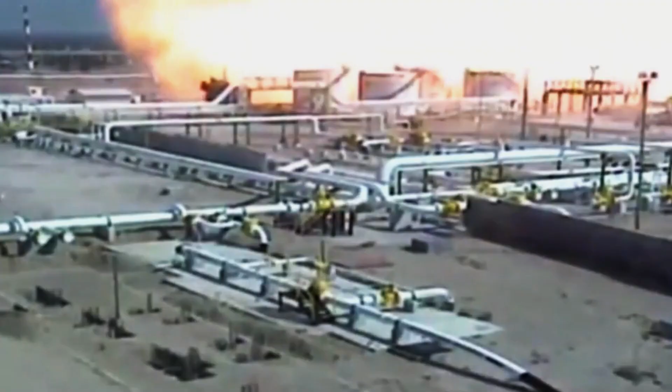A massive explosion rips through a chemical plant in Pasadena, Texas. The blast is so powerful it registers as a 3.5 magnitude earthquake. Windows shatter 8 miles away in downtown Houston. Inside the Phillips 66 complex, steel structures twist, buildings collapse, and a giant fireball rises over the Houston Ship Channel.

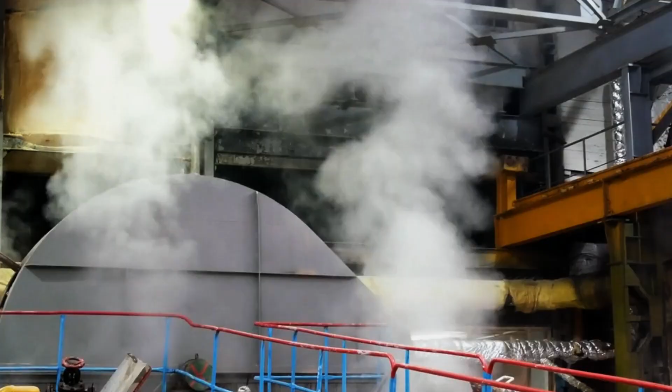In seconds, the refinery turns into a burning disaster zone. When it's over, 23 workers are dead, 314 more are injured, but the explosion didn't come out of nowhere. Just 2 minutes earlier, workers in Reactor Unit 6 heard something unusual, a hiss, not the normal sounds of the plant. A pipe had ruptured, releasing 85,000 pounds of flammable hydrocarbons into the air, ethylene and isobutane forming a massive invisible vapor cloud drifting through the unit.

Workers began to run, because once a cloud like that forms inside a refinery, it only needs one thing: a spark. And on October 23rd, 1989, it found one.

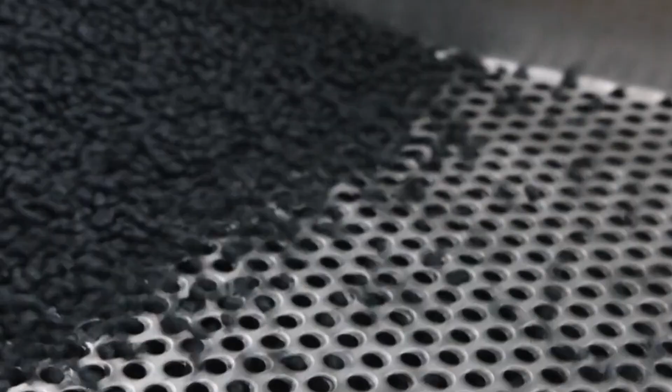The Phillips 66 Houston Chemical Complex wasn't a small operation. Since 1956, this sprawling facility along the Buffalo Bayou had been producing high-density polyethylene, HDPE, the plastic that makes everything from milk jugs to shopping bags to children's toys. The complex had a massive output, 1.5 billion pounds of HDPE per year.

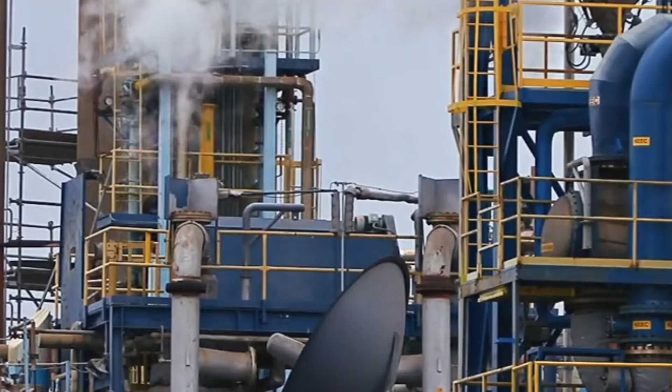That's roughly 15 to 20% of the entire United States supply. On any given shift, over 1,100 people worked on site. Phillips 66 employed about 900 permanent staff. Another 600 or so were contract workers, maintenance crews, construction teams, specialists brought in for specific jobs. The plant operated around the clock, multiple reactor units running simultaneously, each one a pressurized chemical factory producing millions of pounds of plastic. By all outward appearances, it was a modern facility. Safety procedures documented, training programs in place, regular inspections. At least, that's what the paperwork said.

But in the Houston Industrial Corridor, there was already tension brewing. The Oil, Chemical and Atomic Workers Union had been raising concerns for months, complaints about unsafe practices by subcontractors, lapses in maintenance protocols, shortcuts that saved time but added risk. The warnings were filed, meetings were held.

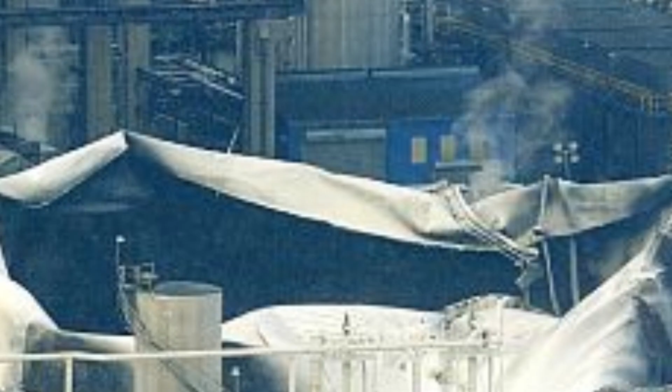Nothing changed. And then, on August 1989, just 2 months before the disaster, something happened that should have been a wake-up call. Subcontractors opened a piping line without properly isolating it first. Flammable solvents vented, the vapor ignited. 4 workers were burned, 2 of them died. OSHA cited Phillips for improper lockout procedures. The fine was minimal. The incident was reviewed, documented, filed away.

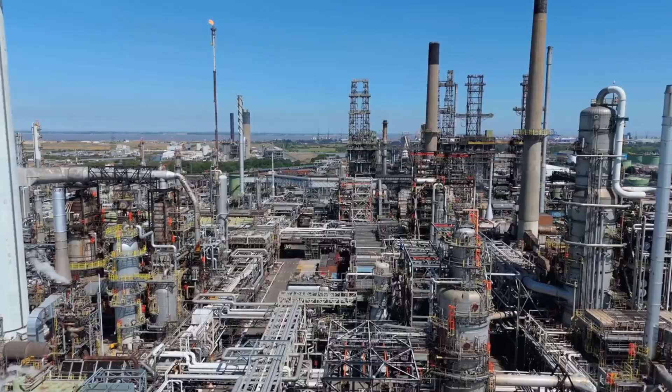Operations continued as normal. On October 22nd, 1989, a Sunday, another maintenance crew arrived at Reactor 6. They had a job to do: clear polymer blockages from the settling legs, just routine work. To understand what went wrong, you need to understand what these reactors actually do.

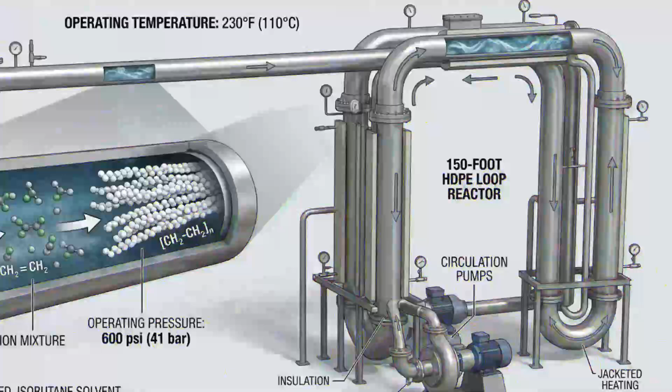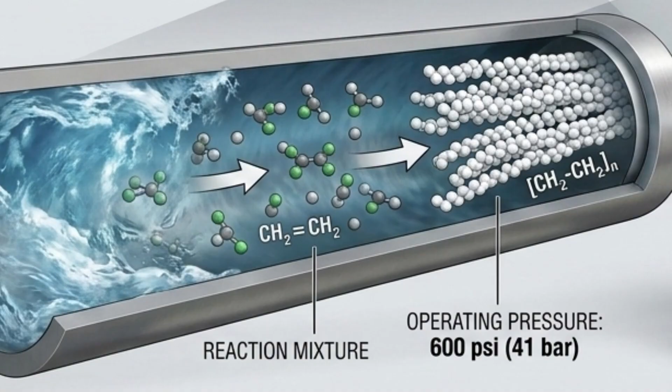High-density polyethylene starts as ethylene gas. Inside a loop reactor, 150 feet of pipe circulating like a pressurized racetrack, the ethylene dissolves into isobutane solvent, along with hydrogen and hexene. The mixture is heated to 230 degrees Fahrenheit and pressurized to 600 pounds per square inch. Under those conditions, the ethylene molecules link together: polymerization. They form long chains that become solid plastic.

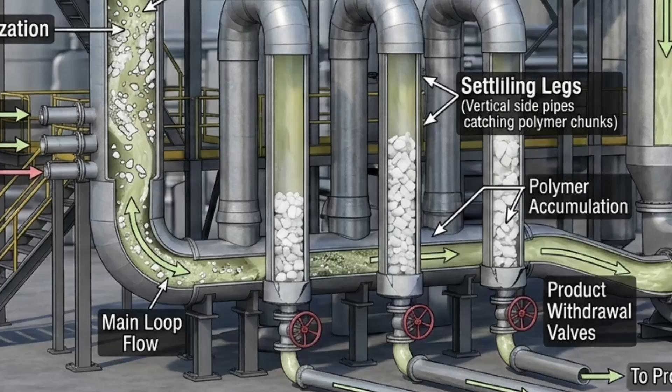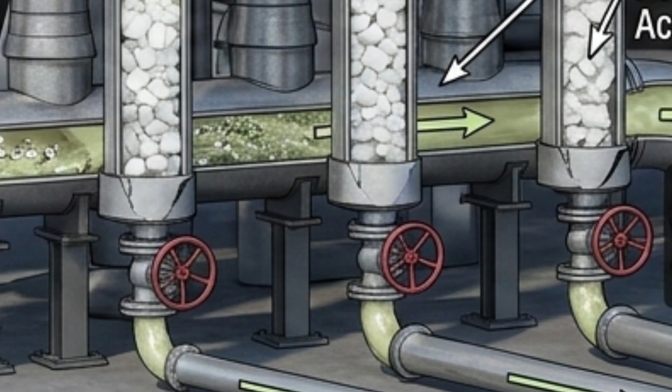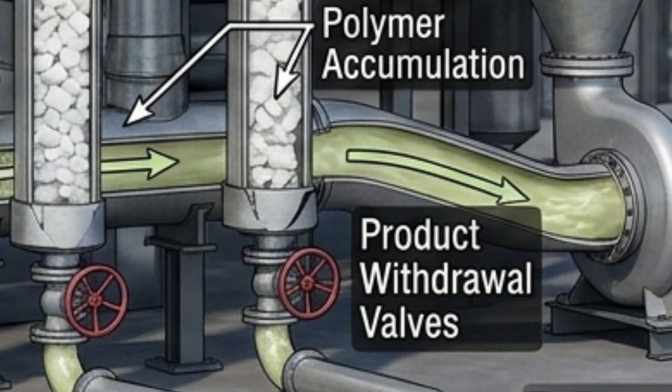But sometimes chunks of plastic solidify and settle. They collect in vertical side pipes called settling legs, designed to catch the polymer before it clogs the main loop. Every few weeks, these legs fill up with hardened plastic plugs. These blockages have to be removed or the reactor can't function. Clearing a settling leg is routine maintenance, but it's dangerous work. You're dealing with a pressurized system full of flammable chemicals at temperatures and pressures that turn mistakes into disasters. One valve opened when it shouldn't be, and all that pressurized hydrocarbon finds the outside air. When that happens, it becomes a weapon.

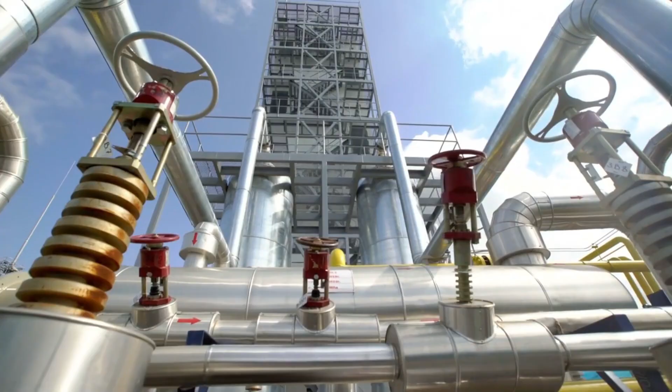The Fish Engineering crew arrived on Sunday, October 22nd. Fish Engineering was a contractor company, hired to handle the maintenance work on Reactor 6's settling legs. The polymer blockage in the second settling leg was stubborn, it needed attention. The crew began their preparation, reviewing procedures, setting up equipment, getting ready for the actual clearing work that would happen Monday. One Phillips operator later recalled something about that contractor crew.

Chuck Soules said they seemed uncertain. His exact words: "The contractors did not know what was going on during the procedure." That uncertainty should have raised flags. But the work continued. By Monday morning, October 23rd, everything was set up.

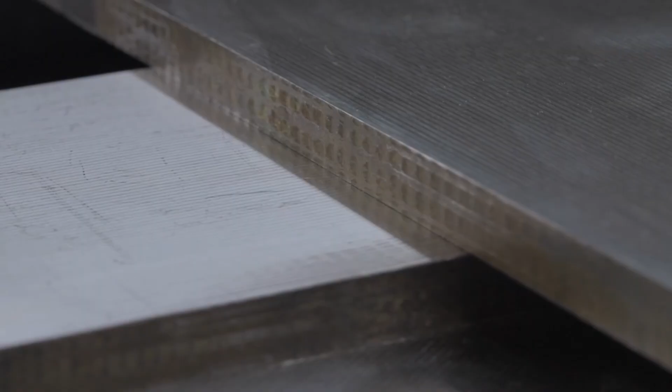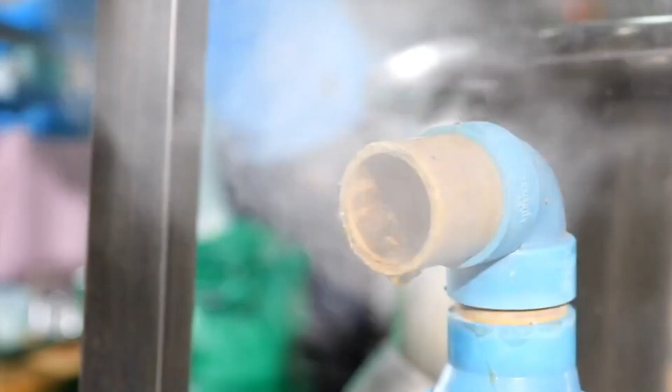The crew was ready to clear the blockage. The procedure required isolating the settling leg from the pressurized reactor. You can't safely work on a piece of equipment that's connected to 600 psi of flammable chemicals. The isolation has to be absolute, physical, verifiable. The standard way to do this: install a blind flange, a solid steel plate bolted directly onto the pipe. No moving parts, no valves that could fail, a physical barrier that makes it impossible for pressurized gas to reach the work area, or depressurize the reactor entirely, drain the system, confirm zero pressure. Create conditions where a mistake can't become a catastrophe.

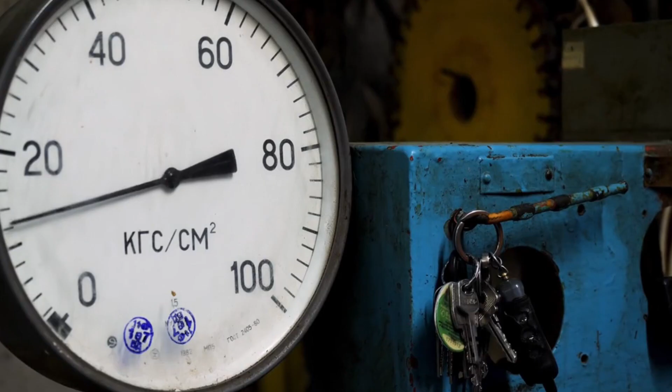But that's not what happened on October 23rd. Instead, the crew used what Phillips called an alternative isolation method. They relied on a closed valve.

They trusted an indicator showing no flow. They assumed the system was safe to work on. They were wrong. The fatal pivot.

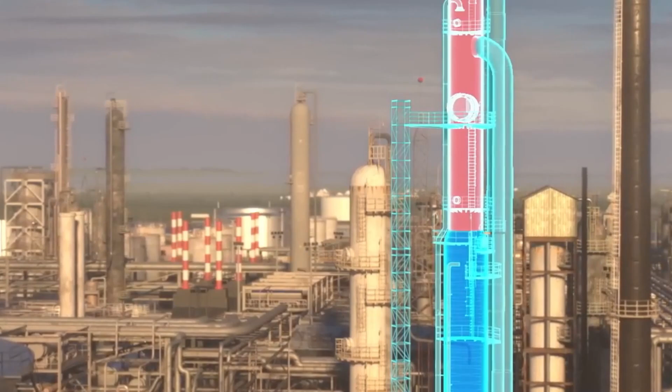Shortly after 1 p.m. on October 23rd, the crew made a decision that would kill 23 people. A safety blocking device was removed from the valve system, and the crew needed to connect pneumatic hoses, the airlines that control whether the large ball valve stays closed or opens.

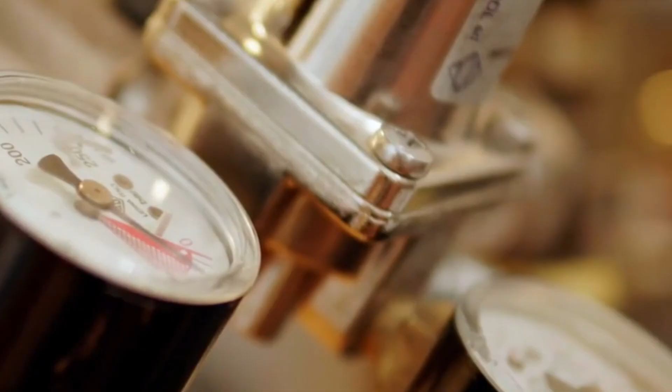There were two hoses, one for air supply, one for discharge. They looked identical, same size, same fittings, same color, interchangeable. The crew connected them, but somewhere in that process, maybe rushed, maybe distracted, maybe just unlucky, the hoses were reversed. Air supply where discharge should be, discharge where supply should be, with the hoses backward.

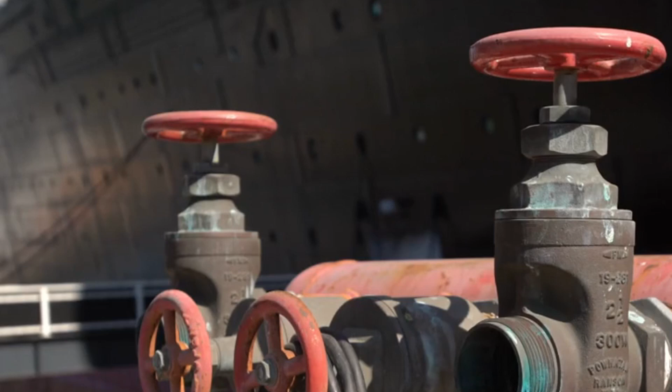And the valve's control system read the opposite of reality. The 10-inch ball valve, a Demco brand valve that was supposed to remain sealed, began to open. No alarm sounded. The indicator still showed closed. Everything looked normal, but inside the pipe, the valve was rotating, opening, creating a path.

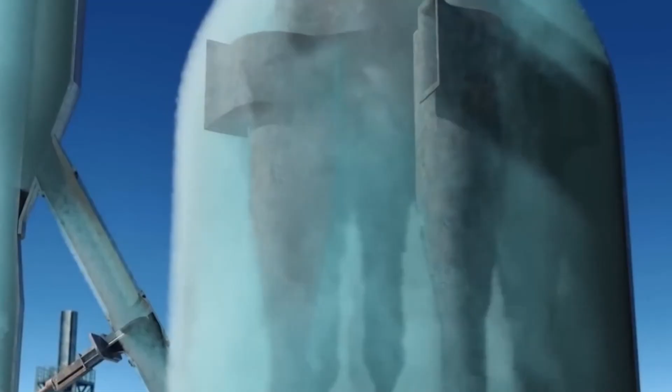The reactor was running, pressurized to 600 pounds per square inch, full of flammable hydrocarbons at 230 degrees Fahrenheit. And now it had a direct opening to the atmosphere. The reactor began emptying itself into the yard.

Release. Two minutes to catastrophe. The hiss started immediately. Not loud at first, just wrong. A sound that didn't belong. Then it became a roar.

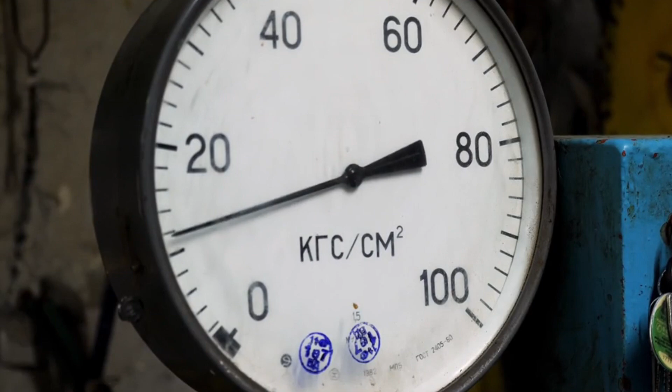Workers near the polyethylene unit heard it first. A deafening rush of escaping gas. Then they saw it. White vapor pouring from the open pipe, billowing up and spreading through the scaffolding and equipment like a living thing. About 85,000 pounds of process gas released in seconds.

Ethylene, isobutane, hydrogen, hexene. A massive cloud of flammable vapor expanding through the plant, flowing along the ground, searching. The alarm siren sounded across the complex. Workers ran. Mike Sinai was 23 years old, a contract worker in the area.

He later described what he saw. "I saw white gas in the air. We heard the alarm. People were falling into ditches." Men sprinted for exits, dove behind equipment, jumped fences. Some didn't know which direction to run.

The cloud was everywhere. The vapor kept spreading. Heavier than air, it flowed like water through the unit, around corners, between buildings. An invisible wave searching for any source of ignition. A hot pipe, an electrical spark, a running motor, anything. Somewhere in that expanding cloud, it found one.

90 seconds, maybe 2 minutes. That's all the time between the first hiss and what happened next. At 1:05 p.m., the vapor ignited.

The explosion was instantaneous and overwhelming. 2.4 tons of TNT equivalent. The blast obliterated everything within 250 feet of Reactor 6. A blinding flash, a thunderous boom that echoed across the Houston ship channel.

Mike Sinai: "Metal was flying in the air and it's just blowing up. It knocked me about 30 feet and you just got up and started running. I jumped the fence and ran over the bayou and just kept on running." The fireball rose hundreds of feet into the air and black smoke followed.

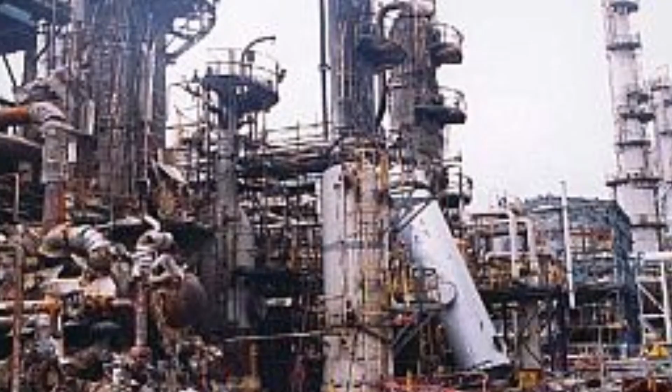Steel structures, multi-story pipe racks, reactor frameworks, bent and twisted like tinker toys. The control room for the polyethylene unit, located too close to the process equipment, was completely destroyed in the first blast. Eight miles away in downtown Houston, windows shattered.

Shirley Morales lived about a mile from the plant. "The blast knocked things off my walls and blew my windows and screens out." She thought a bomb had hit her house, until she ran outside and saw the columns of flame and smoke.

Mike Buchanan was driving on Interstate 10, 5 miles away. "Everything shook with that tremendous boom, and then it began raining pieces of sheet metal." Seismographs registered it as a 3.5 to 4.0 magnitude earthquake.

But the nightmare was just beginning. The secondary explosions. 10 to 15 minutes after the initial blast, as workers fled and first responders rushed toward the plant, a second massive explosion rocked the complex.

Two 20,000-gallon isobutane storage tanks had been sitting near the polyethylene unit. The spreading fire reached them. The tanks ruptured. Another enormous fireball erupted into the sky. Workers and firefighters dove for cover as debris rained down again.

25 to 45 minutes after the first explosion, a third major blast occurred. Then another polyethylene reactor vessel in an adjacent unit failed catastrophically. The heat and pressure from the surrounding inferno breached its containment.

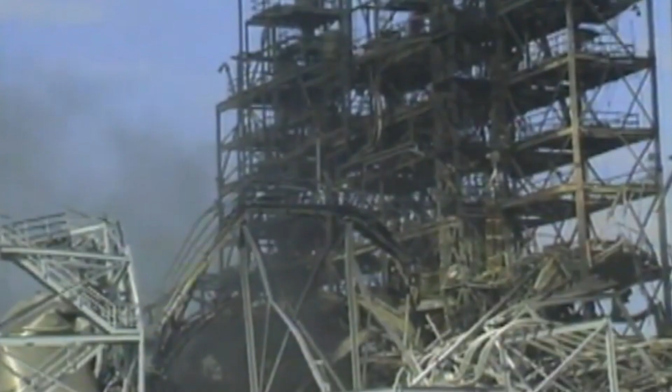The initial explosions had wrecked the site's infrastructure, and critically, they had destroyed the firefighting water system. The complex didn't have a separate firewater supply—it relied on the same water lines used in chemical processes. The explosions severed these lines, fire hydrants were sheared off at ground level, and water pressure, exactly when it was needed most, plummeted to nothing.

Backup diesel pumps that could pressurize the system failed. One had been out of service for maintenance. Another ran out of fuel after running briefly. Electrical fire pumps went offline when their power cables burned through.

Firefighters had to improvise. They laid hose lines to retention ponds, to the cooling tower basin, to the water treatment facility on site, to a neighboring company's water main. Anywhere they could get water, they used specialty foam pump trucks from mutual aid partners, mass deluge equipment, anything that could throw water and foam onto the flames.

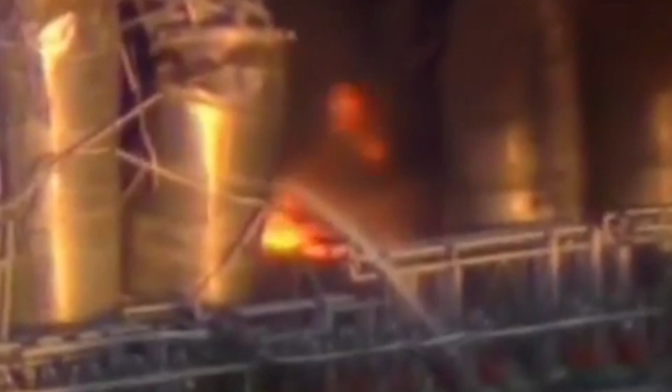It was a 10-hour battle. Crews poured thousands of gallons onto the twisted wreckage of the plant. Slowly, gradually, they gained ground. The main fire was brought under control late that night, but even then, smaller fires and hot spots continued to smolder.

The water rescue: during the height of the fire, over 100 employees found themselves trapped. The administration building sat on the complex's waterfront, along the Houston Ship Channel. Normal exit routes had been cut off by flames. Workers couldn't evacuate on foot without walking through the inferno.

They took shelter in the building and waited. The Coast Guard and Houston Fire Department mobilized boats. Firefighting vessels and rescue craft crossed the ship channel to the plant's dock area. One by one, they ferried more than 100 people to safety on the opposite shore. The water evacuation likely saved many lives—those employees would have had no way out otherwise.

The heat was too intense to enter the worst-hit areas until the next morning, October 24th, even after the flames were extinguished. The wreckage was structurally unstable—twisted metal, collapsed structures, the risk of further collapse. Search and rescue teams waited for the site to cool, then moved in carefully, documenting everything, searching for victims.

The Harris County Medical Examiner's Office coordinated the recovery. They worked methodically—any physical evidence that might explain what happened had to be preserved. The grim count was confirmed: 22 workers dead at the scene. One more would die later from injuries. 23 total. Most of the bodies were found within 250 feet of Reactor 6.

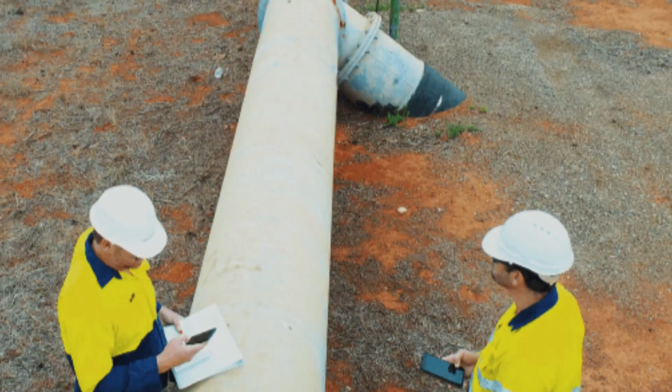How did this happen? OSHA arrived within an hour of the initial explosion. Inspectors and safety specialists moved in quickly to preserve evidence. They documented the scene, photographed debris, collected samples, interviewed survivors. Over the next 6 months, OSHA engineers reconstructed what happened with forensic precision.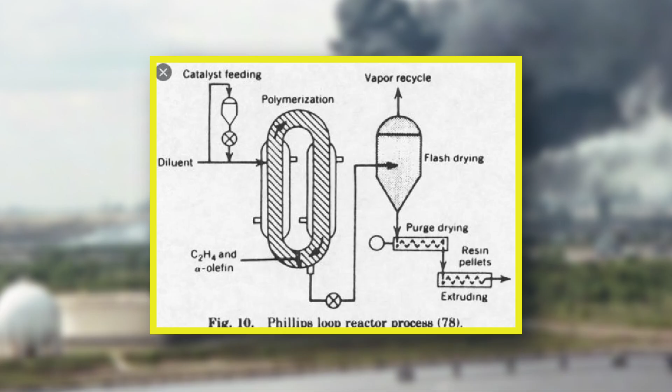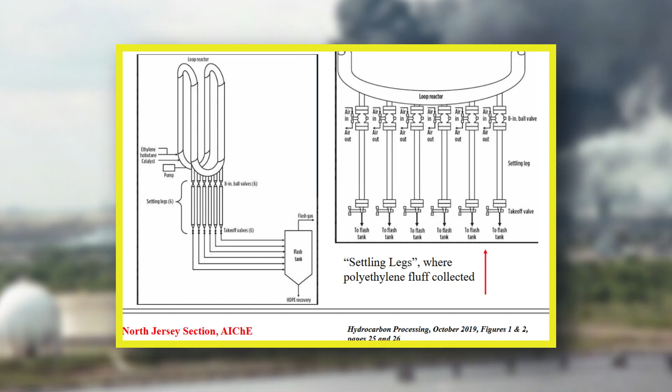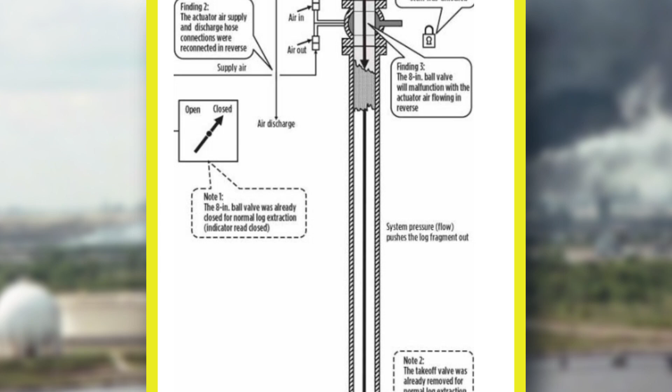They traced the sequence step by step—the maintenance procedure, the isolation method, the valve operation, the hose connections—and they found the answer everyone had been asking. The crew working on the settling leg had no effective isolation between the pressurized reactor and the section they were working on. They used Phillips' alternative isolation method, trusting a closed valve and the absence of flow. But that method failed. The pneumatic hoses controlling the valve had been connected in reverse. When the crew thought they were keeping the valve closed, they were actually commanding it to open. The 8-inch ball valve opened directly to atmosphere.

99% of the reactor's contents explosively decompressed in seconds—600 psi of pressure forcing 85,000 pounds of flammable chemicals into the open air. Then investigators found something even worse: a critical design flaw that made this disaster inevitable.

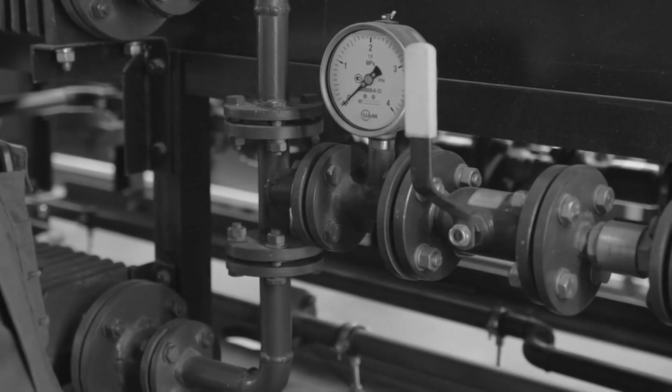The air supply hose and the discharge hose for the valve were identical. Same diameter, same threads, same fittings, same appearance. No labels, no color coding, no physical difference whatsoever. An operator could reverse them, and no one would know until it was too late. Even the valve position indicator could show closed when the valve was actually open. Human error made possible, made likely, by catastrophic design.

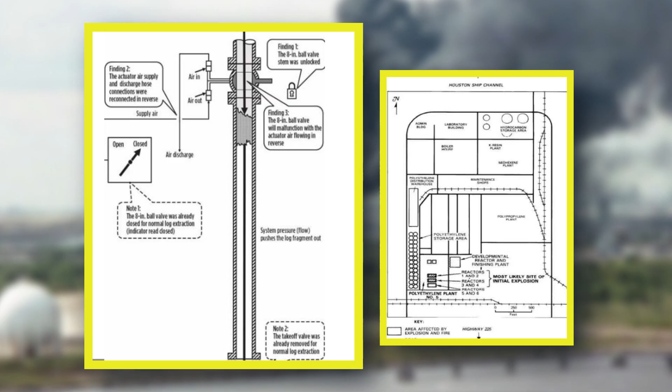But the investigation didn't stop there. The procedure that killed—OSHA's conclusion was damning. The procedure for clearing settling legs was grossly inadequate. It didn't ensure proper lockout. It didn't require physical isolation. It left too much room for human error, and Phillips knew it.

Internal documents, uncovered during the investigation, showed that the company's own engineers had noted issues with this procedure before. They had recommended improvements, and management ignored those recommendations. The plant layout made it worse.

OSHA found inadequate separation between buildings and between occupied work areas and hazardous equipment. Distances violated accepted engineering practices.

The control room was so close to Reactor 6 that it was demolished in the initial blast, meaning no emergency shutdown actions could be taken. The isobutane storage tanks were close enough to the process unit that the fire caused secondary explosions. There were no blast walls, no segregated zones, no protection for escape routes.

The firewater system had no dedicated supply, a known vulnerability. Heavy reliance on contractors for critical maintenance without sufficient oversight created what investigators called diffused responsibility for safety.

The Fish Engineering crew was performing a high-risk task at the heart of the operation, but they weren't as experienced or trained in the plant's hazards as they should have been. Chuck Soul's observation that they did not know what was going on was prophetic.

The receipts: after 6 months of investigation, OSHA presented its findings. 566 willful safety violations and 9 serious violations, all attributed to Phillips 66 in connection with the explosion. Fish Engineering, the contractor, received 181 willful violations and 12 serious violations.

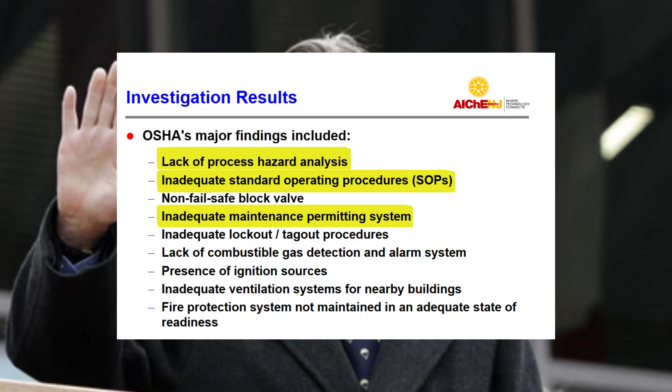OSHA's official report to the president listed the underlying causes: poor risk assessment and management, lack of redundant systems and fail-safe engineering, inadequate maintenance of equipment, poorly conceived operational and maintenance procedures, and incomplete employee training. Every single factor either led to the accident or made its consequences worse.

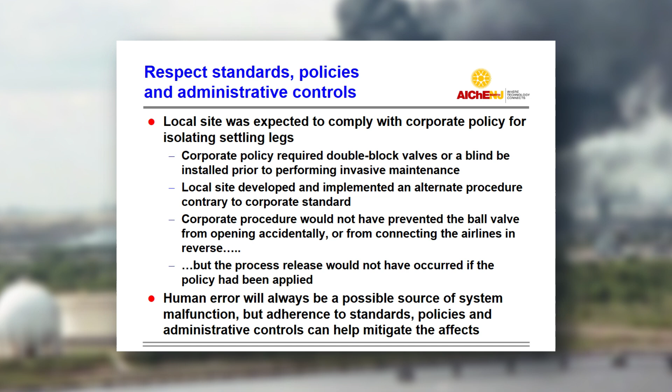And then there was the August incident, 2 months before the big explosion, which killed 2 workers when contractors opened a line without proper isolation. OSHA had cited Phillips for improper lockout procedures. The warning was documented. Nothing changed.

Phillips Petroleum initially contested the citations, as did Fish Engineering. A legal battle loomed, but in 1991, a settlement was reached. OSHA agreed to drop the willful designation from the violations. In exchange, Phillips paid a $4 million fine and committed to implement extensive process safety management reforms at the Pasadena complex and other facilities. Phillips also settled numerous lawsuits with victims' families confidentially.

Workers' compensation claims were paid to the injured. Internally, the company overhauled procedures: stricter permit systems for maintenance, improved contractor training, and new emergency response protocols. But the question remained, would it actually change anything?

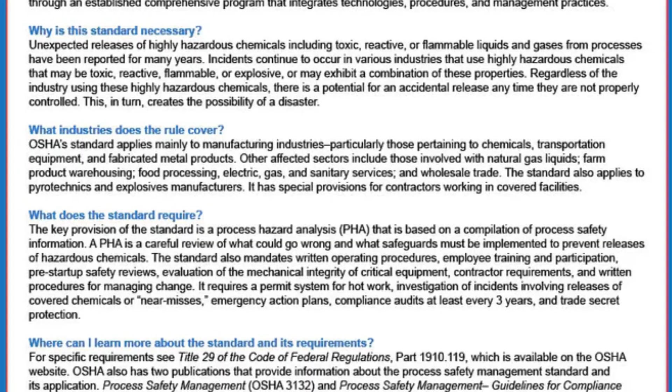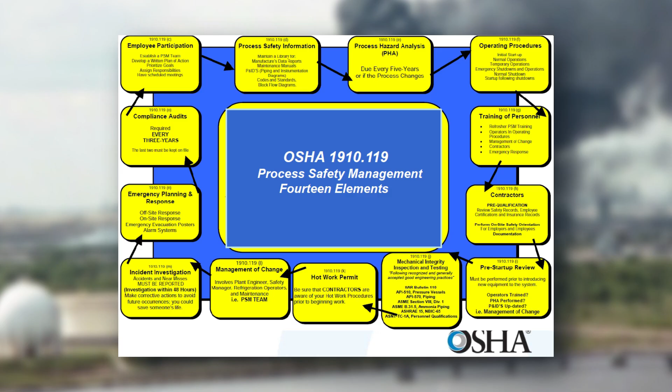The Phillips Pasadena explosion became a catalyst for change in the petrochemical industry. In 1992, OSHA finalized the Process Safety Management Standard, a comprehensive set of regulations designed to prevent major chemical accidents. Companies had to identify hazards, maintain equipment properly, train operators thoroughly, manage changes safely, and plan for emergencies. The PSM standard became law.

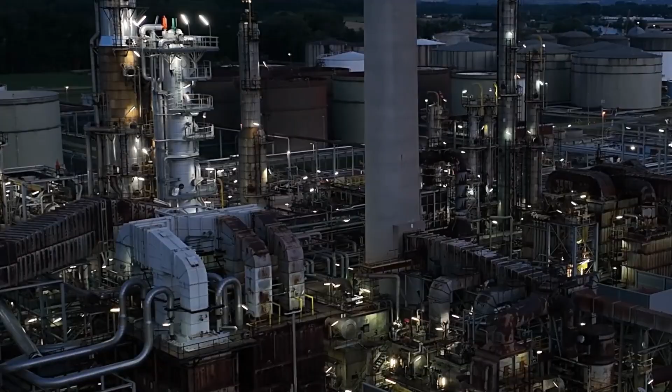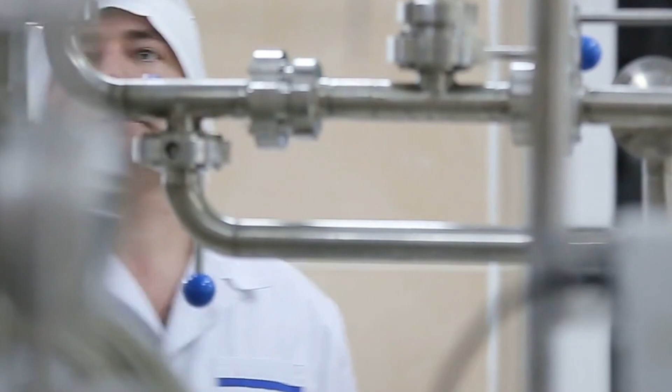Phillips Pasadena was cited during the rulemaking as an example of why these regulations were urgently needed. Across the industry, companies re-examined how they used contract labor, with greater emphasis on training, better oversight, and clear responsibility for safety in multi-employer work sites. Engineering practices evolved.

New plants were built with better equipment spacing, fortified control rooms, automated isolation valves, and redundant safeguards. Fire protection systems improved with dedicated firewater reservoirs and looped hydrant systems. The lessons seemed learned, but here's the bitter truth: the Phillips Pasadena complex was rebuilt, and it continued operating through the 1990s.

In 1999, there was another explosion at the same plant; 2 contractors burned to death. In 2000, another fatal explosion. Worker safety, despite all the regulations and reforms and promises, seemed to have remained just a dead letter.

Close: October 23, 1989, started as a routine maintenance day. A contractor crew working on Reactor 6 followed standard procedure to clear a polymer blockage from a settling leg, then a hiss, and a white cloud spreading through the unit. 2 minutes later, 2.4 tons of TNT equivalent detonated.

23 people were gone. The explosion wasn't an accident. It was the culmination of every warning ignored, every shortcut taken, every safety measure dismissed as too expensive or too inconvenient — 566 willful violations found by OSHA.

Internal documents showed engineers flagged the dangerous procedure. Management did nothing. A fatal accident 2 months earlier had the same root cause. Nothing changed. A contractor crew that didn't fully understand the system they were working on was sent in anyway.